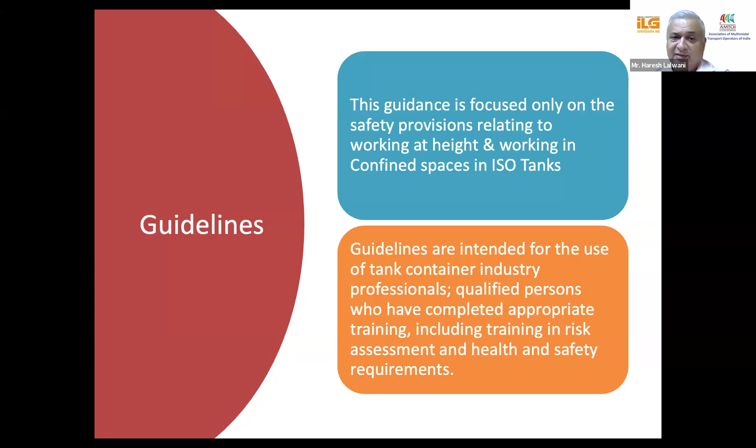So I hope it is very clear. Please don't go ahead and do things which are not supposed to be done. You need special training. You have to get that training, and that is how you work forward. Please understand that.

So, understanding a tank container, what is the primary design of a tank container? We are looking at it from different angles, but it is designed for filling and discharge at a shipper's terminal facility or a consignee's facility, which is equipped with permanent top access gantries so that there can be any entries that they want to. Beyond that, everything is ancillary.

When I say ancillary, I mean that there can be someone who's transporting the container, someone who's cleaning the container, someone who's examining the container, someone who's checking whether this container is right or wrong, or someone who is testing, somebody who is repairing. So there are many such things, but the primary objective is that the tank container is going to carry cargo for the shipper till the consignee. And that is what a tank container is basically for.

So it is basically for loading at a shipper's terminal facility and discharging at a consignee's terminal facility or tank or wherever they want to do it, whether they are transferring it into smaller packages or not. So moving forward, it is believed internationally that wherever and whenever it is possible, working on the top of the tank should be minimized and, if possible, eliminated.

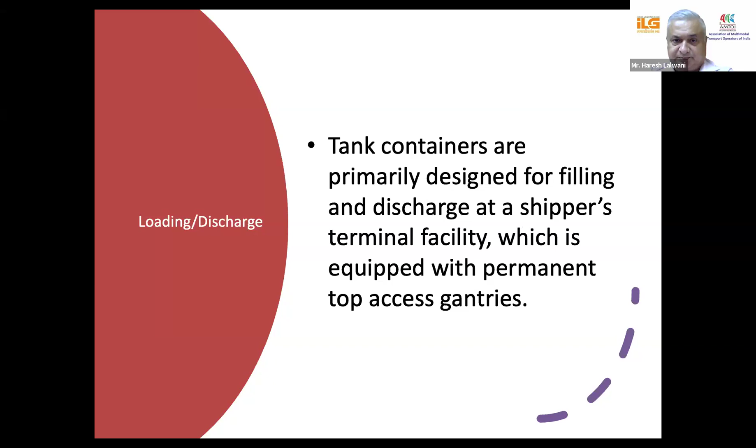Now, what are the common operations on top? Manlid opening, sampling, inspection, cleaning, maintenance, filling and discharge. I'm going to go into a little detail, like manlid opening. The manlid can be opened at the depot, because they need to clean the tank, whether they have to use machinery to clean the tank or whether they need human intervention or someone going inside the tank, which is going to be the next topic following this.

And many times what happens is that customs says, we need to go and take a sample of the cargo. Now you need to understand that you are going on top of a container to take a sample, not taking it from the bottom discharge valve, but going on top, opening the manlid, not knowing whether the tank is under pressure. If it is full and you have been asked to take a sample, you have to be very, very careful and make sure you have understood, if it is a laden tank, what kind of cargo it's carrying inside, whether it has been pressurized, whether it has been purged, is there nitrogen purging in it?

And just by opening the manlid, if it is under pressure, you're going to create a scenario where the manlid will jump out. It'll open with such force, and there may be an incident or an accident that takes place, which may even take a human life. At the same time, the secondary part, which is not as important, but important, I would say, is that you would be spoiling the cargo. So again, this is something that people do on top. Then comes inspection.

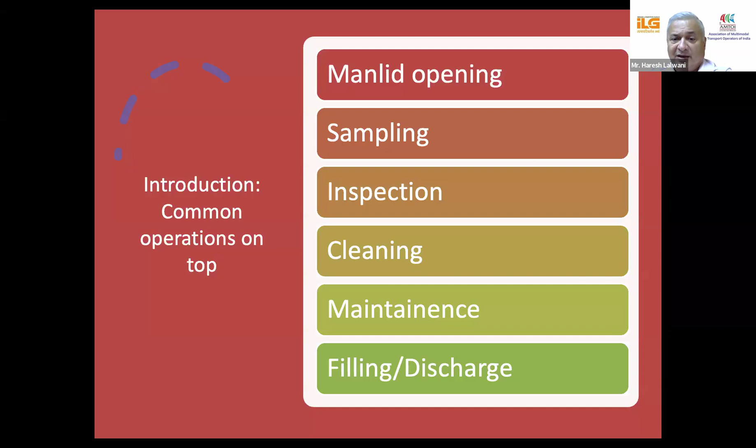Now, all these things have to be done by creating an SOP. It's not safe to just go up and say, okay, this is what I'm going to do and this is what I am not going to do. So these are the things that we need to understand when we move ahead.

Now, working on top of a tank container, what happens? I've told you the different scenarios, but you need to understand that when you look at the tank container, it has a way to go up, a ladder on the side of the tank. But when you walk up, there is no support on top. So you have to climb up the ladder and then go on top of the tank, which is a little difficult.

Now the tank is on top of a truck. It has come to your factory, whether it is laden or empty. You walk on top of the tank because you want to see whether you can open the manhole or connect some connections that need to be connected. Not realizing whether it's rainy season, whether it is slippery because of water, or slippery because someone has by mistake spilled some of the last cargo over it, or when you open the tank, whether there is a residual hazardous substance.

There are limited handholds. There are few safety barriers or no safety barriers, and there is a lack of fall protection. So you are on top of a tank which is on top of a truck, standing there and trying to do your work, which may or may not be required or as per SOP, but this is something that we do over here. And we do not create an SOP. All we do is just go on top and say, okay, this is what we need to do. Come on, let's go and check.

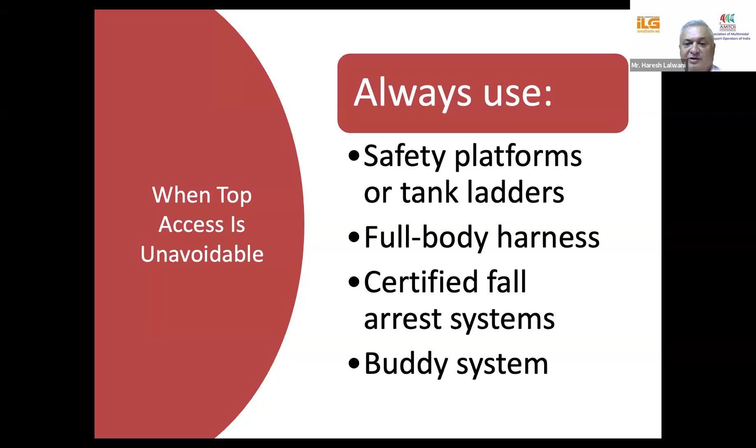And the point here is that unless you are safe, you are not supposed to go up on a tank and try to do any work, whether it be just going to learn about a tank or even standing on top of the tank to see how a tank looks from the top. So, yes.

Then there is also personal protective equipment, where you have to ensure that the moment you go on top of a tank, you always wear a helmet with a chin strap. That prevents the helmet from falling when you are bending down, turning around, or looking down at the tank if there is a repair or cleaning or you want to fit something. Safety gloves and boots are very, very necessary.

And you need to understand that the ladder that is going to be used should be big enough for a person's boots to fit in so you can walk up. Then there is the high visibility vest, so that people know where exactly you are in the event that the lights go off or there is any other problem.

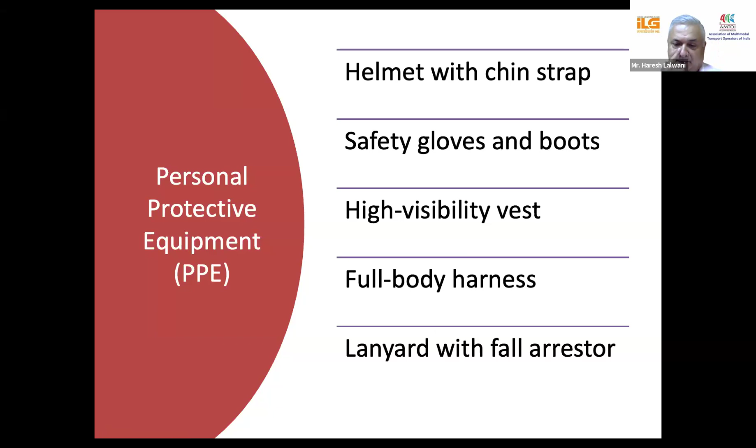The full body harness is what I already told you about, and the lanyard with a fall arrestor. I just explained what the fall arrestor is. The lanyard is a rope attached to it, which is then attached to a hook on the ceiling. So in the event that you ever slip or fall, you will never hit the floor where you are standing. If nothing else, it'll make sure that you will not be hurt, or even if you are, it's not going to be very serious.

Then coming to fall protection equipment, again, when going on top, I just explained that you need an anchor point. These anchor points are usually certified and they're up on a ceiling. Now, something which is better than that is what is called the self-retracting lifeline. The moment it senses that you have slipped or it comes against a jerk, the spring action takes place and it pulls you back.

So it takes you a little away from gravity. It goes against gravity and holds you safer. Then there are mobile access platforms with railing.

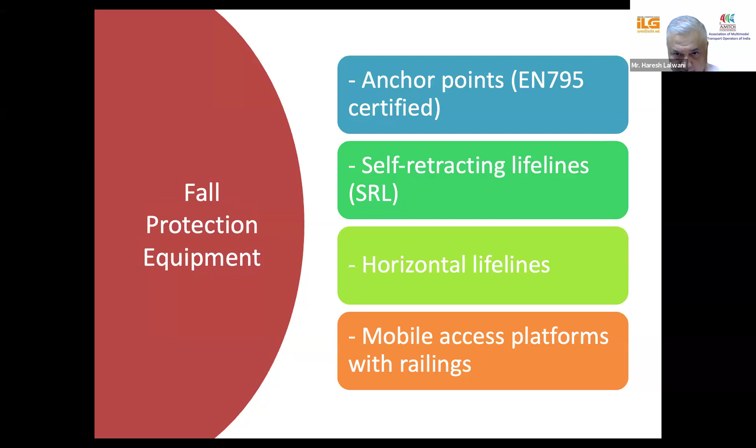Now we need to understand what are the standard operating procedures that are required. Depending on the kind of work we are doing, we need to make a risk assessment of every task. Now, when I say task, if you're a cleaning station, then the task is different. If you're an inspecting company, your task is different. If you are an exporter, your task of loading is different. If you're an importer, discharge is going to be different. And if you're repairing the tank, or if you are a trucking company, everyone needs to create their own

SOPs. Now, again, there are trainings that are required for someone to get this risk assessment done. And it is always to be done before you actually take up this task. When a person is trained for this risk assessment for which you have created an SOP, that particular person is then allowed to do that kind of work, which should be called the permit to work.

Then, for the kind of repairs that need to take place, you have to first make sure that when you go up on the tank, depending on your role, you have a toolbox. Whether that means you have to attach a tube to the air release valve, push nitrogen into the tank, or top discharge, you need to have all your tools with you. You cannot go up there and then decide, oh, I am missing this thing, when your task is half done. So that's why an SOP will have to be created: when this happens, what are the tools that you require?

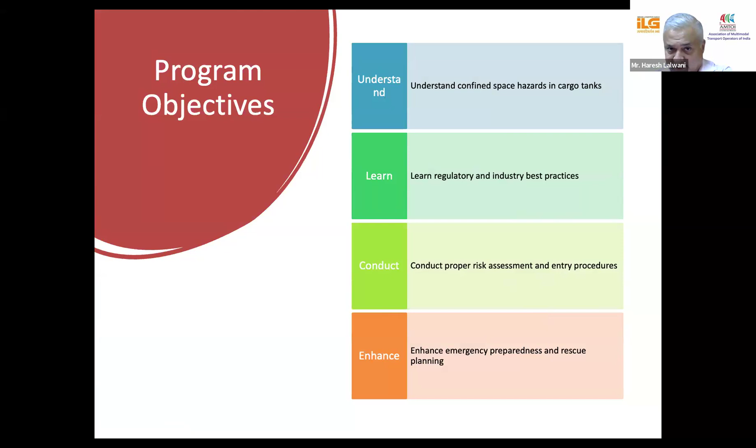First, let us understand what is a confined space in an ISO tank. First thing is it has adequate size and configuration for personnel entry. Now, when we are talking about tank containers, the only way that you can enter a tank container is through a manhole. So it has the adequate size and configuration for a person to enter the tank.

Then it has limited means of access or egress. Access means getting inside, egress means getting out, coming out. You have to do it through that same manhole. It is not designed for continuous employee occupancy. So someone cannot just go in and sit and make a home out of it. And it has an internal configuration that might cause an entrant to be trapped.

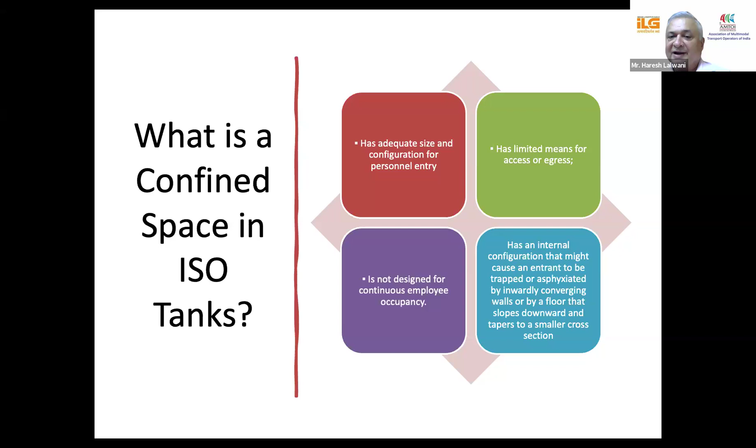So you can be trapped, asphyxiated by inwardly converging walls or by a floor that slopes downward and tapers to a smaller cross section. Now, if you see a tank, I'm sure everyone understands a tank. It is round in shape. So there is no way that you can stand on any side, and it is inwardly converging. When it comes to a floor, it slopes downwards and upwards. So yes, this is what a confined space in an ISO tank is. I hope that is clear to everyone.

So again, the first thing: never enter a confined space if there is a safer way to complete the task. Now, there are safer ways to complete the task, looking at it from your role in the tank container industry. If you're a cleaning company, you may or may not enter, but usually now, with the new systems that have come in, you do not need to enter inside the tank unless, of course, there is a repair that needs to take place. Otherwise, you do not need to do it.

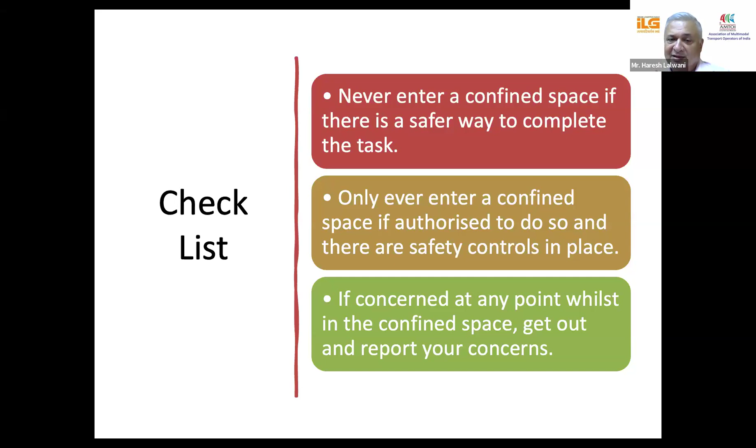So if you are authorized to do so, I will explain how you are authorized to do so. And are there safety controls in place? That's the second thing. And if concerned at any point whilst in the confined space, get out and report your concerns. So what brings your concern? It may be a very bad smell, a problem with your breathing, coughing when you entered, any change in your bodily functions, or you feel faint. These are the kind of things where you have to leave and get out. Your life is more important than anything else, so before you get in, you need to be sure of what you are doing.

So the term permit-required confined space is basically by OSHA, which means a space that meets the definition of confined space, which I explained in the earlier slide, and has one or more of these characteristics: contains or has the potential to contain a hazardous atmosphere. Now, this is what I said. If you get into a tank, there is a possibility that the last cargo may contain a hazardous atmosphere, or it contains a material that has potential for engulfing the entrant. So when you get inside, if the oxygen content is less, there may be a problem.

Has an internal configuration that might cause an entrant to be trapped or asphyxiated by inwardly converging walls or by a floor that slopes downwards and tapers to a smaller cross section. Yes, that is also there, and contains any other recognized serious safety or health hazards. Now, this is as per OSHA, so I have to read this out to you as it is. I cannot break this up, but I will always tell you that when you are going to enter a tank, the first thing you need to understand is when you open the manhole,

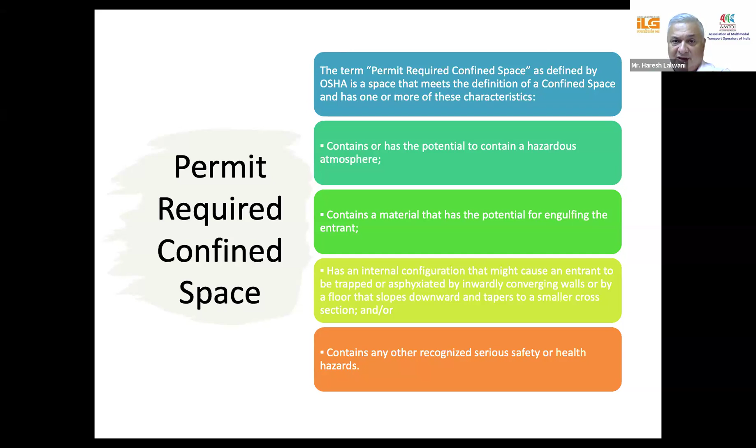Okay, sorry. Now we come to why cargo tanks are high risk. Because these tanks are used to carry cargoes of different classes all the time. There can be one cargo on a trip from a load port to a destination port. And then at that destination port, the tank is discharged. Another cargo is loaded into that tank, which goes to another destination port, and so on.

Now, this creates hazardous vapors. Sometimes, even when you clean a tank, some of this remains inside, and sometimes the tanks need to be aired. Then, when you are entering a tank, the other high risk is that there can be oxygen deficiency or enrichment. The human body cannot work with deficiency or enrichment. So when you get inside, you have to check all these things.

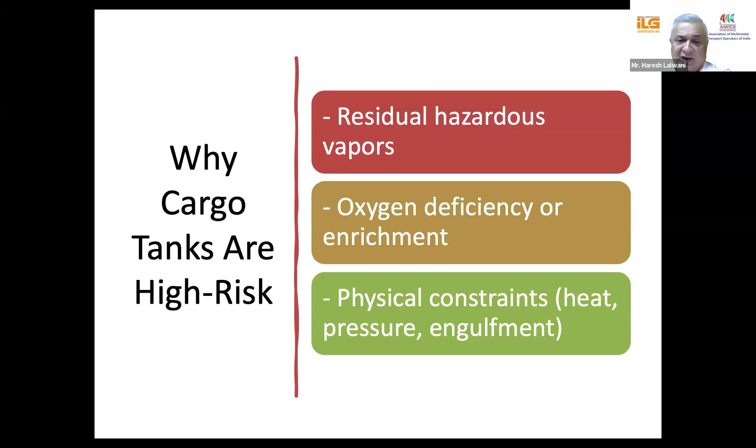And of course, when you are going inside, there is heat. If there is pressure, is there a possibility of engulfment? When I say heat and pressure: you're opening a tank, the tank has just come in empty from some place and it's 40, 45, 50 degrees outside. Yes, that is a possibility. Second, if the tank has been heated for discharge, and you are then trying to open the top to see what is inside, again, there is a problem. I've explained what pressure is and whether the tank is under pressure or not.

So before you get into a tank, what do you need to see? The first thing is whether there is a cleanliness report, and that it's a proper certificate that the tank has been cleaned. Then, when you open the top of the tank, the manhole lid, from the other side, even if you're wearing a mask, and you see any presence of vapors, you have to stay away from it.

Always before entering, ensure that you have measured the oxygen with an oxygen meter. Irrespective of whatever happens, the first thing you need to do is measure the oxygen content. And of course, if the tank is under pressure, even if it is empty, even if it is cleaned, you must not open the top, the manlid of the tank, because the tank is under pressure.

Usually the tank is under pressure when the customer or the shipper asks for it, because their cargo requires the tank to be absolutely dry. So nitrogen purging of half a bar is done in the tank to maintain pressure and ensure that there is absolutely no condensation inside the tank.

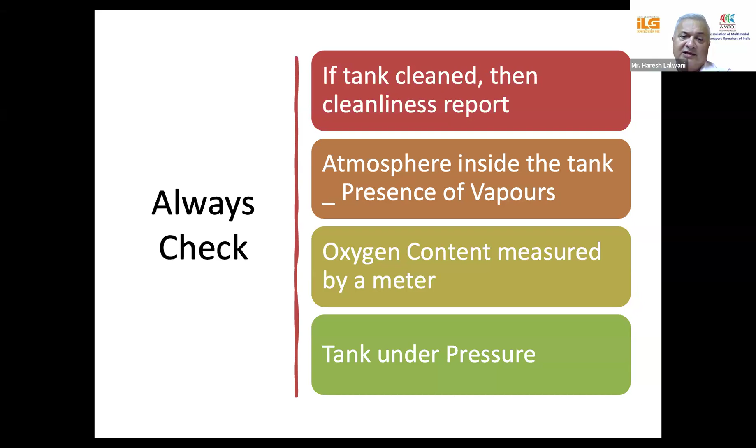We also looked at getting on top of the tank container. There is also a risk assessment and SOPs of getting inside the tank. So again, like I said, you need to create a risk identification checklist. You need to make sure that the steps of confined space entry permit, like I've explained earlier, as per OSHA's, the roles and responsibilities of every person need to be done and they need to be trained.

And you need to create a sample permit format, which depends on the kind of industry that you are in. And that format needs to be created accordingly. So if you are a shipper, your format is going to be different. If you're a surveying agency, your format is going to be different. You're a cleaning company, your format is going to be different. And if you're a shipping line and an operations person, then your format is going to be absolutely different. So you need to create all these SOPs and make sure that things work as per requirement.

Now, when you are getting into the tank, I've still not got into the tank and I'm still telling you what needs to be done. So yes, gas and/or oxygen meter is always required. You always need to have ventilation and breathing equipment when you get inside a tank. When you get in, there should always be a possibility that there is breathing equipment that is given to you. There is sufficient lighting inside, so you realize what is happening, what is the floor, is it slippery, is there some residue that may harm you.

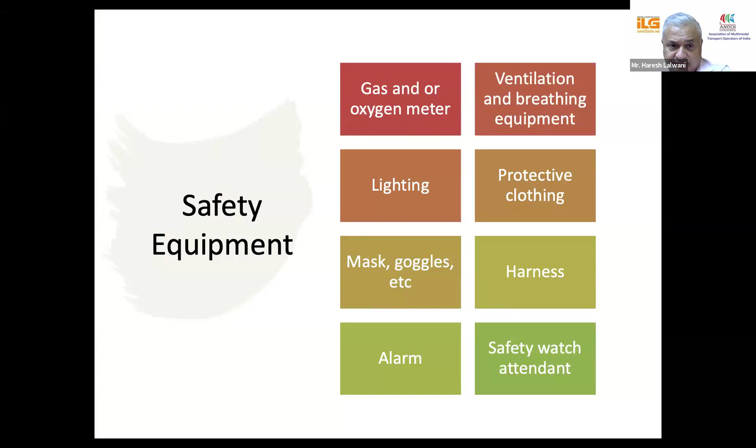I repeat myself again that there should be a communication setup which allows you to pass an alarm or a signal to the person who is standby and waiting as your buddy outside, to ensure that if something goes wrong with you, he is there. Now, you also need to understand why training for getting inside a tank is very, very necessary. Because if you are not aware of the risks, you are only going to endanger your own life.

Tina, are you able to hear? I just got a message saying that there is no audio. I hope everyone else can hear because we can hear it loud and clear. So sorry to interrupt in between. I can hear it properly. There's no issue. Great. So if anyone is not able to hear it, request you to please check your audio at your level also. Great. Everybody has confirmed they can hear.

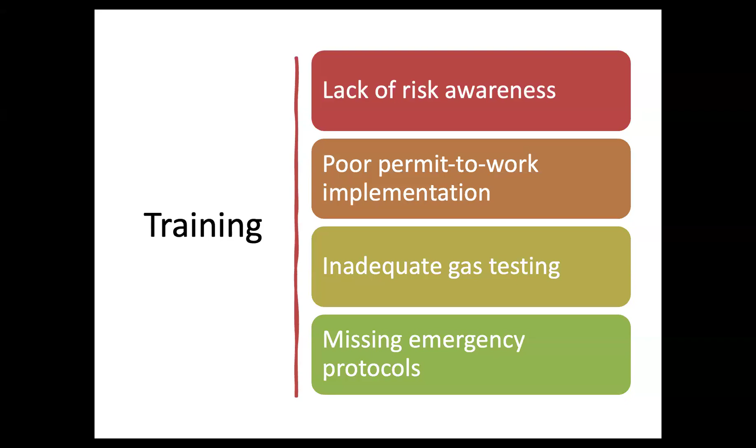Okay, so we'll continue. Now, this is where the training is absolutely necessary because you have to be aware of all the risks that you are getting into as a human being. I've explained to you what the permit to work is. It has to be implemented. If it is poor, you have not done it properly, you have not created the right SOP, you are going to be in a big problem.

Then there is what is called inadequate gas testing, which I've already told you about. You need a gas meter, but you should understand that you should be trained how to use all these equipments. And you should also be trained in all emergency protocols. If you're not going to be trained in emergency protocols, you will never ever be able to help the other person.

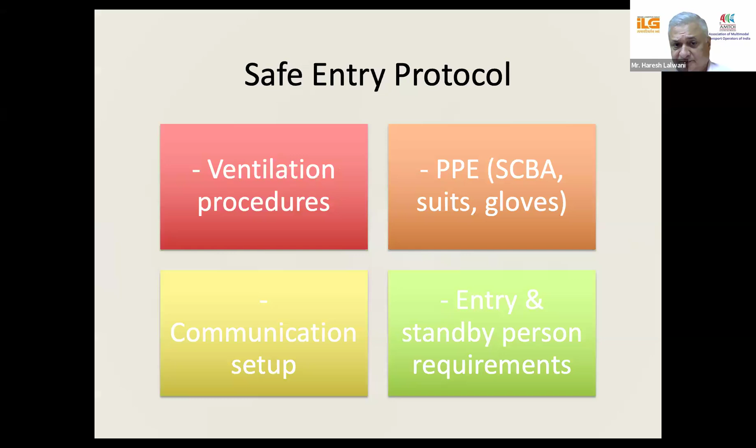Then there are gas meters that will give you what the types of gases are, and if you're not trained, you will not know whether you should enter or not. So there are going to be different kinds of gases which need to be detected, and the meters need to be calibrated. And even pre-entry and post-entry, there has to be continuous monitoring of the gases. If any problem comes in, an alarm has to be raised immediately.

And the point about training is that unless you are trained, you will never be able to interpret the results that you get out of all these atmospheric tests. You have to be trained well enough to understand that if you are feeling giddy, you need to get out. If there is a smell of a certain kind coming in, you need to move out. If the gas monitor gives you a different kind of reading, you have to leave. And that is very, very necessary.

For these, there are regulations and there are standards. Of course, the OSHA confined space standard exists. There is an IMDG code that exists. There's an ISO 11623, which tells you what to do. And of course, the national safety standards; India is coming out with their own BIS standard. And of course, the EU directives are also there.

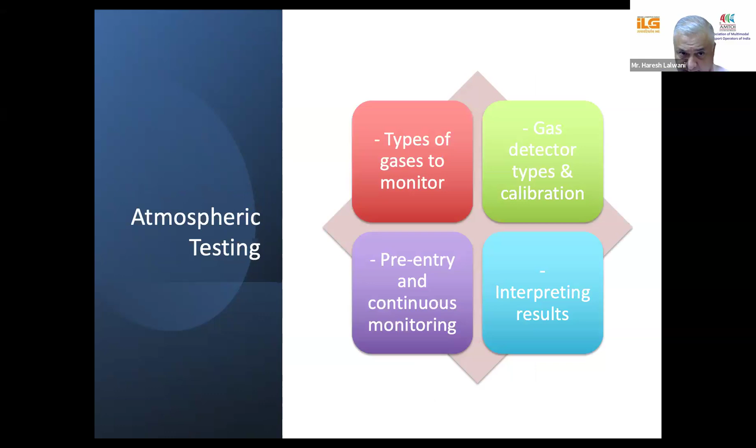What is very necessary for emergency response is that at any given time, you have to have a rescue plan. You should have a rescue drill at irregular intervals. I won't call it regular intervals. You have to decide one fine day that, okay, I'm going to have a rescue drill and this is how I'm going to do it. And there are the roles of the internal and external responders, so you need to understand what the responder is going to do and what messages they have to pass.

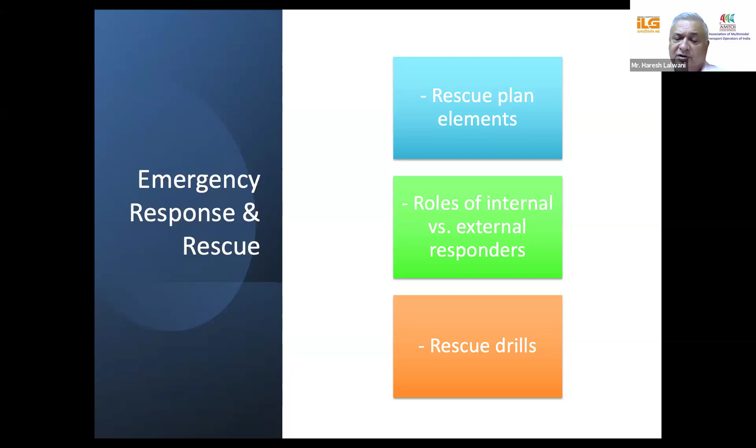The very important thing here is, suppose you are the buddy standing outside and something happens to a person inside, say the person faints. Your immediate reaction is that you will try and get into the tank. No, you cannot do that, because if he has fainted inside, you will also go and faint. The next thing you have to do is make sure there is an emergency response system, and rescuers who can use a crane or a lifting device to pull the person out of the tank, and not three more people going in and falling prey to the same problems.

Now, based on all this, the summary and key takeaways are that confined spaces require very strict controls. You have to use tested permit to work systems. You have to always monitor, communicate, and plan rescues. And you have to apply SOPs to prevent all kinds of accidents. I have tried to make this as simple as I can, and when you get trained for this, it's going to be a very different thing.

This is just to make sure that you understand the problems that you may face when you are dealing with tank containers physically. So the people in depots and factories are the kind of people who are in physical contact with the tanks, climbing up, climbing down, going to depots, climbing up on containers and trying to check. These are the people who need to be aware of it.

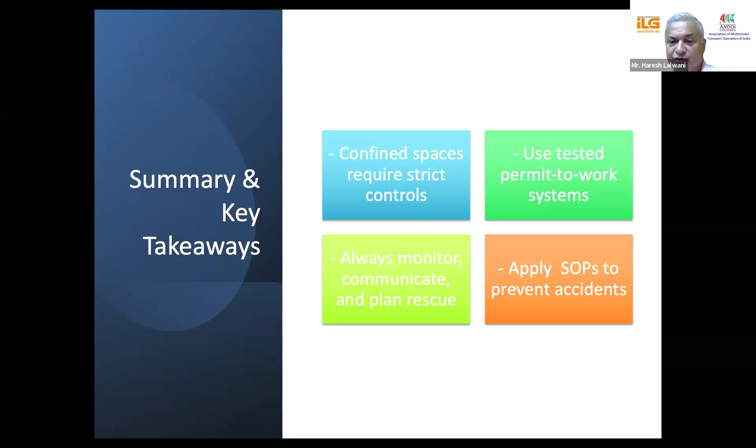But at the same time, the people sitting inside the offices also need to know the perils that the people in operations face, and always make sure you are reminding them of the things they shouldn't be doing. Are you carrying anything that is required? Are you carrying safety equipment or not? That is something you also have to promote and ask them.

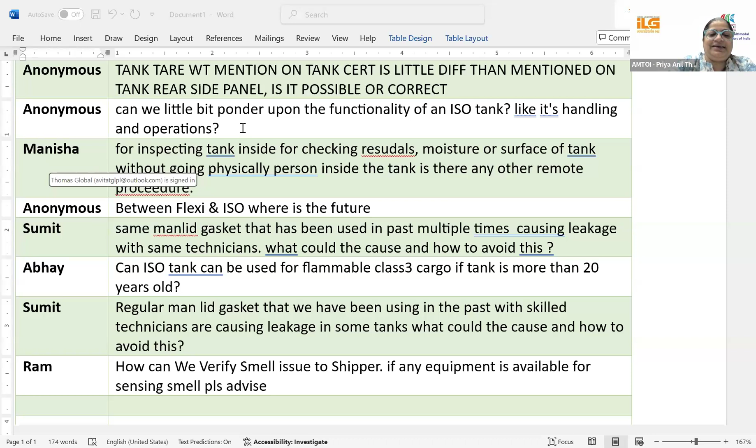Okay, I'll take up the question and I'll give the answer also. For inspecting tanks inside, for checking residual moisture or the surface of the tank without a person physically going inside the tank, is there any other remote procedure? So yes, there are procedures. The procedures are that the tank, before it leaves the depot, is clean and dry. And if the moisture existing in the tank really affects the cargo, then it is best that it is sent under nitrogen purging into the factory. So you don't have to go inside and the tank is safe, clean and dry at all given times.

So basically, no one has to go inside. There cannot be any residue. The residue is not going to be there because you're already going to have the tank inspected, which usually every Indian exporter insists on. So I hope I've answered that question.

We have a question from Anonymous. Between Flexi and ISO tank, where is the future? That depends on what you know and what you do. ISO tanks can carry dangerous cargo. Flexi tanks cannot carry dangerous cargo. Both carry liquids. So the future is in both. It all depends on what your expertise is.

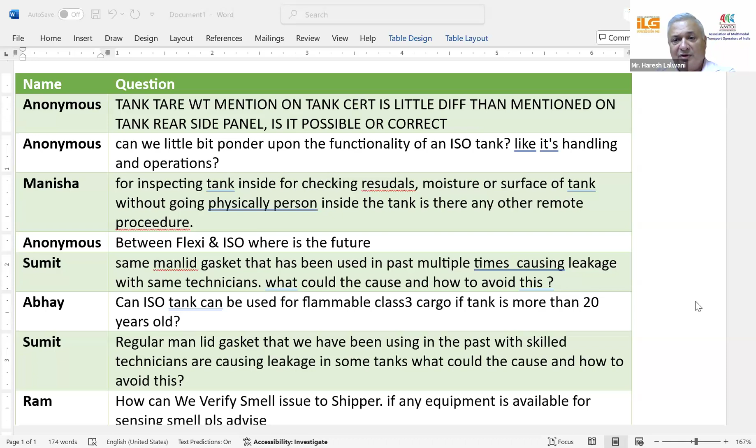Then we come to Sumit: the same manlid gaskets that have been used in the past multiple times are causing leakage with the same technicians. What could be the cause and how to avoid this? It's very simple. If the gasket has been used too many times, you need to change it. I do not know why some gaskets have not been changed, but every time there is a new cargo, I think you should change the gasket. And if not, it depends on the compatibility of the cargo.

Can an ISO tank be used for flammable class 3 cargo if the tank is more than 20 years old? The age of the tank is not a problem. The tank has to be tested, and if it passes the 2.5 and 5 year test, it can carry.

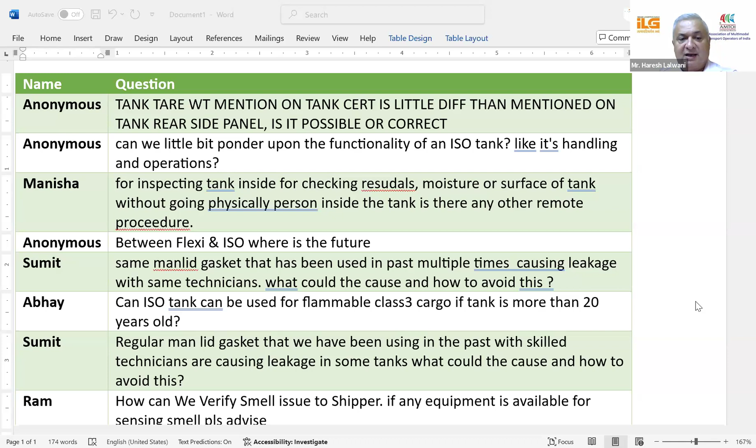Sumit, the regular manlid gasket that we have been using in the past with skilled technicians is causing leakage in some tanks. What could be the cause and how to avoid this? I don't know what a regular manlid gasket is, but you need to use a good quality gasket, and the skill lies in fitting the gasket in the groove and tightening it. There is also a sequence of tightening the manlid, and once that sequence is followed properly, you cannot get any leakages.

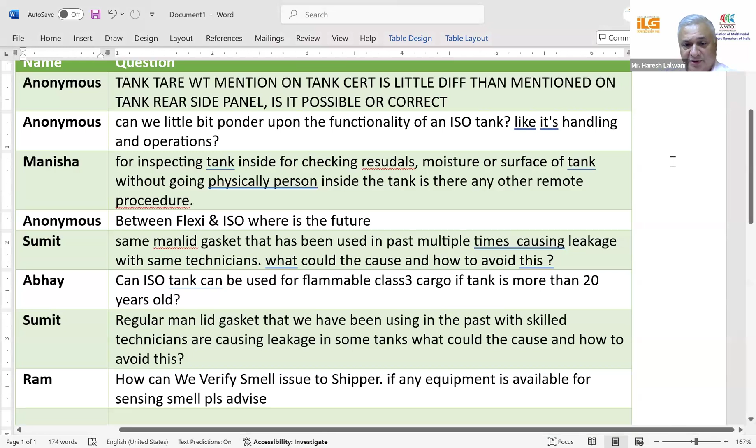How can we verify a smell issue to the shipper? If any equipment is available for sensing smell, please advise. Well, it's a nasal thing, so what you may smell, I may not smell. So I really don't know how to give you an answer for this. It all depends on the sensitivity of your nose and your client's nose. But usually, once a tank after cleaning is shut for whatever time, when you open the manlid, there will always be some sort of a smell.

So my point here is that unless you air the tank and allow the tank to be open for some time, the smell is always going to be there. Now, whether that smell is of the chemical used in cleaning the tank, or whether it is the soap or detergent that was used that you are smelling, you really don't know. But usually it's not good to just open the manlid and smell. There can be a smell of a previous cargo also.

I thought I saw somebody else saying yes, something, but it's on the chat. They are asking, does the tank have insulation or heating option? Of course. It all depends. Again, see, there are different types of tanks. For that, you'll have to hold another session, a complete new session on the kind of tanks and the type of tanks that are available and the type of cargoes that can be carried.

So yes, the tanks can carry all kinds of cargoes, right from liquids; it can be heated. You can get a hot and cold tank. You can get a tank that can carry gases. You can get a tank which can carry compressed gases. There are tanks that will carry cargoes that other packagings cannot carry. You can get rubber lined tanks, you can get coated tanks. You name it, there is a solution that is available. So yes, I guess I've answered all questions.